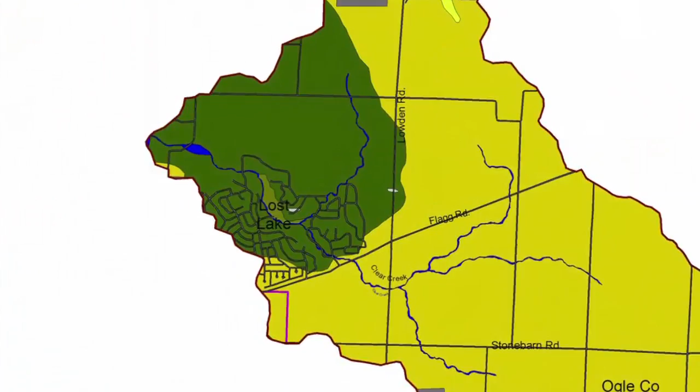Okay, this lake you see behind me is really born out of a community that was started way back when. But it's an 88-acre lake setting in a rural community with farmland all around us. And as this community grew and was developed, the developers actually took a stream that ran through here and developed this lake. And this lake certainly is just part of a watershed that's 10,000 acres around us.

In 1978, the River Conservancy District was born. And as the RCD was developed, one of the things that we understood as of late is that we had responsibility not only to maintain this lake, this particular part of the watershed, but also improve the lake and the watershed around it. And over the years, the Conservancy District was charged with monitoring the conservation of the lake, which encompasses a lot of things, from pollution to fish to wildlife to lake use and those types of things.

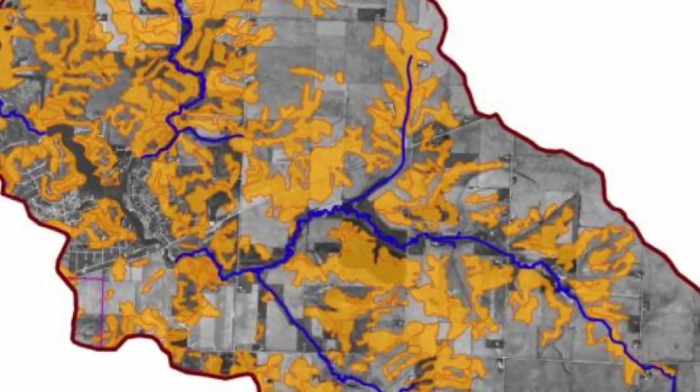So the River Conservancy District first recognized that they had problems with their lake, and also recognized that these problems don't just stem on their property but upstream from them and what's coming down into the lake from neighboring properties. And there's not one spot. You can't point to one source. So therefore it's called non-point source pollution. It's just a cumulative effect of pollutants coming from many, many different places.

Anytime you have sedimentation or sediment coming in or being eroded off the shorelines or off the stream banks or out of agricultural fields, it becomes a non-point source pollution problem. The sediment itself is a pollutant because it degrades the water quality and silts in the lake and causes environmental concern. But there's also nutrients associated with those sediments that are coming into the lake, which feed algal conditions and algal problems, weed issues, and other environmental factors that need to be remediated.

When you stabilize stream banks, the benefit to water quality is largely that you're holding back the sediment and soil that is on the slope. The rule of thumb is you want to keep the ground on the ground, and you don't want it in the water. And once you get soil in the water, it becomes a pollutant in and of itself because it degrades the water clarity, which degrades the habitat. Fish can't see to capture their prey. Aquatic plants no longer have sunlight to grow. When sediment is allowed to enter the stream or the lake, it carries with it a lot of pollutants.

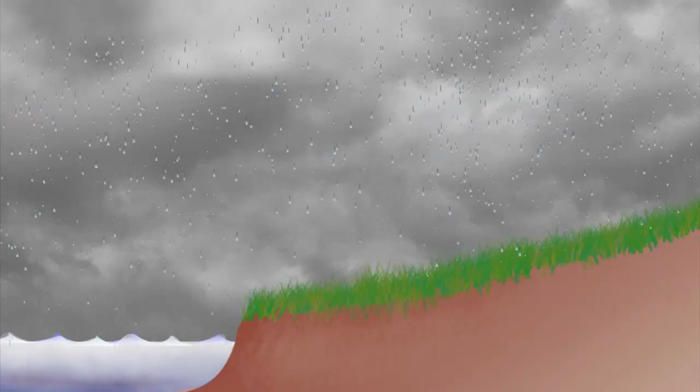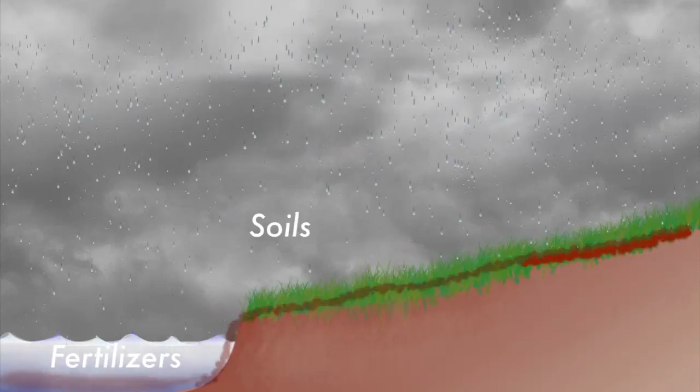In the situation around the lake, we're dealing with homes that have lawns straight up to the lake's edge. And anytime there's a storm event, that runoff that's running over the lawn and into the stream is going to carry with it any fertilizers that they used on the lawn, and it's going to carry with it any soil if there are bare spots on the lawn, and it's going to carry away the dog poop, the goose poop. All that, once it gets into the water, then it's a problem.

When upstream, we're dealing with kind of similar substances, but a different situation. Now the fertilizer's coming from farm fields, and the soil becomes a much bigger problem because every year those fields are tilled, and so we are dealing with large expanses of bare spots, basically, that are not covered in some sort of grass cover. And so if you're dealing with a pasture, a lot of people think that cows are a big problem for water quality, but when you look at just the land use, the grass that is a pasture has a much better capacity of capturing sediment and pollutants before it enters the stream when you compare that to a bare crop field.

The area that flows through Babbling Brook is about 3,000 acres that comes in from that tributary directly into the lake. There's a separate tributary that drains the rest of the 11,000 acre watershed. And what really brought a lot of awareness to the people who live here and see this area day in and day out was a storm event that happened in 2009.

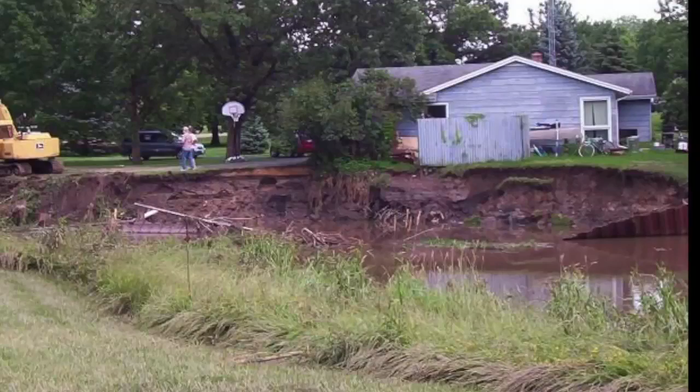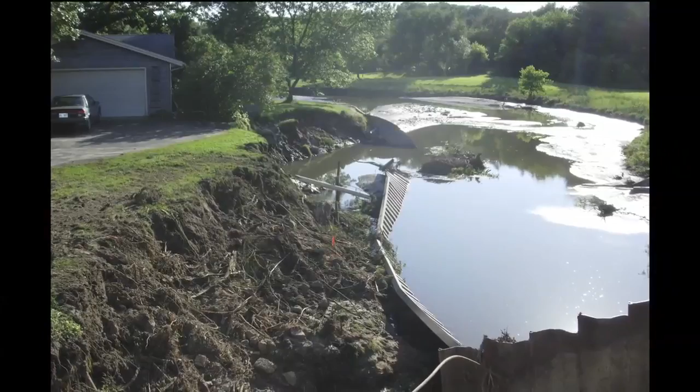And the storm event in 2009 absolutely blew the banks out of the Babbling Brook. What was considered a lazy little creek turned into a 15-foot wide creek that had banks of solid soil, 90-degree angle, that were about 6 feet tall. Well, during the flow, the banks were significantly eroded, and there's a sharp bend in the stream that the water angle attacked and significantly eroded the bank back into a homeowner's property. This created a lot of turbulence in that area, and that created a significant amount of erosion.

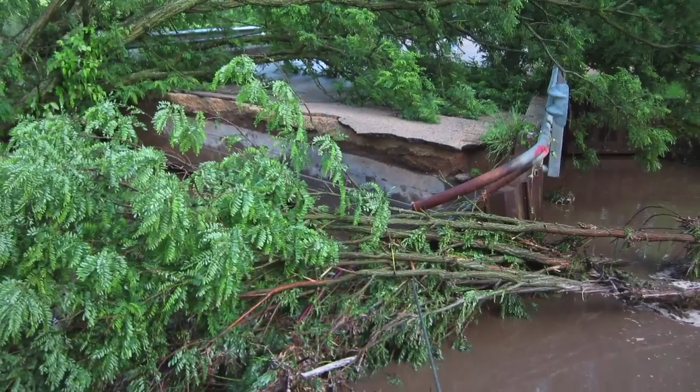The Babbling Brook actually washed out a bridge, lost probably 12 to 15 foot of shoreline along the stream bank on big reaches of the stream. This is what the old-timers will call a 100-year flood. And the experts will tell you it fell within the definition of a 100-year flood. That being said, the mission of the RCD in terms of taking care of the lake, not only for what it is today, but planning for the future, led to our thought of a project to stabilize the stream bank on Babbling Brook. To do that, we had to get a team of experts involved early on.

One of the things we did here is we established a team of individuals that can address all the different topics in a professional fashion. One, you've got an environmental or lake consultant that gives you the background and the things that are needed from an environmental and a pollution control perspective.

You've got an engineer that can help design projects that have the stability to withstand the flow conditions over a long period of time. Then you have to have people like Rebecca that has a grant writing ability and a planting background to ensure that we have the right plants in place and can actually secure funding to assist with a project like this.

And you have to have a project coordinator like Steve that's going to go out and do the groundwork to get the people in place and the landowners to agree to what's going on and understand what's going on, and to have a group buy-in to make sure this is a successful program.

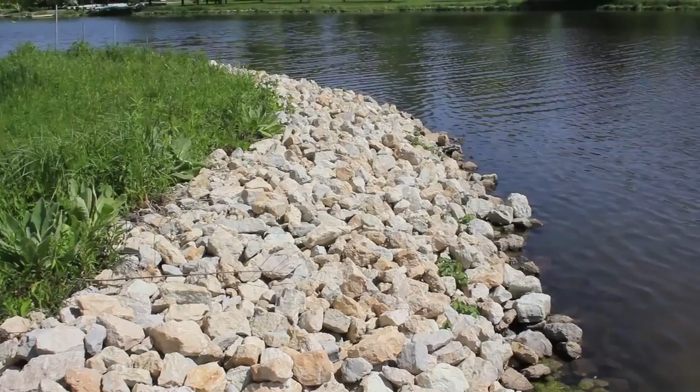And to do this, they graded their slope back on their banks, put down a bedding fabric, put down a bedding material, and put down an RR3 rock, which is a rock that was gauged for the stream flow conditions within the lake. It's much more costly to remove soil once it gets in the lake than when it's sitting there on the shoreline. So this was a cost-effective way to lessen a pollutant in the lake.

So we established that program, and we had quite a few property owners take advantage of that. We actually were able to stabilize about 70% of the shoreline that was pre-identified as the most problematic to the lake.

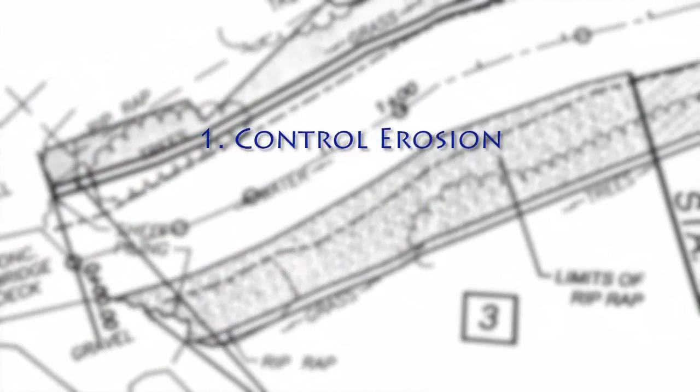Now focusing on the stream bank, there's about 800 feet of stream bank that we decided we're going to stabilize as an effort to minimize soil coming into the lake. The purpose of the remediation had three goals. One was to control erosion, which was significant in this reach. The second was to maintain the flow through the reach. And the third was to create or enhance the habitat.

We used a series of techniques to stabilize the section of Babbling Brook, our project area. And part of the reason that we used a variety of techniques was to show people what different methods could be used, with the idea that they'll learn from this. This is a stretch that they can come and see and then recognize, well, I have a similar problem on my stretch, and now I see what I can do, and start the ball rolling for other people to do projects on their own properties throughout the watershed.

And so if you start from the bridge and work your way upstream, the bridge, it's kind of a channel. In fact, most of the area we're working in had been channelized at one time, which led to some of these problems in the first place, because a naturally meandering stream is going to be able to handle the force of a storm better than a channelized area. And so right next to the bridge, we have the most channelized area that needed the most reinforcement.

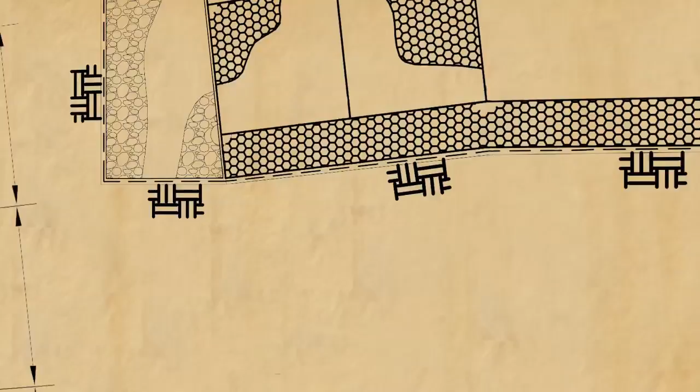One of the areas had a very steep bank that we could not change the slope on. With that, we decided to use a gabion structure. Gabion baskets were selected for the area of the high bank because there was a road at the top of the bank that could not be moved, and the bank had to remain where it was. So the gabion baskets were a perfect fit.

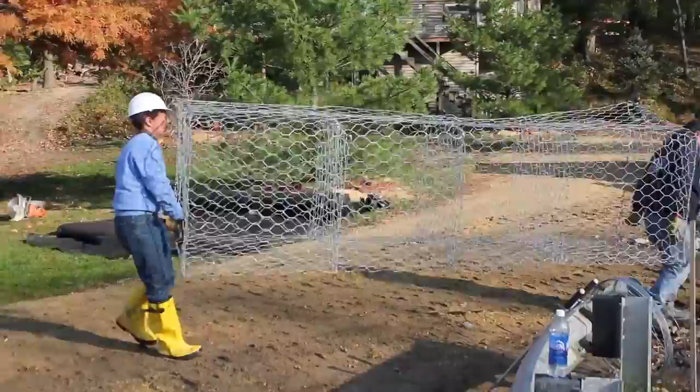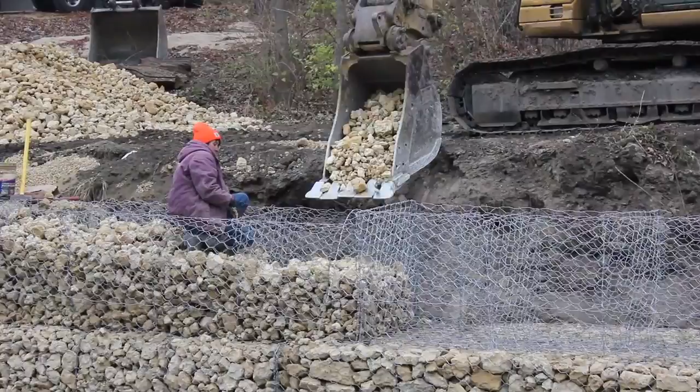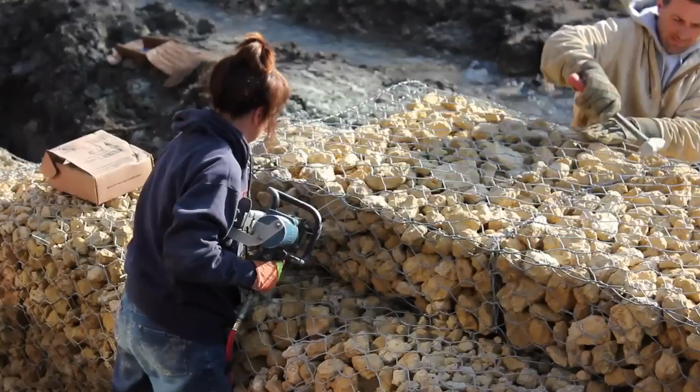The gabion baskets themselves consist of pre-manufactured wire baskets that are set in place, individually filled with rock, closed, and then another basket set adjacent to it, individually filled and closed. And you can build a wall on a slope that's much, much steeper. And so we used that in the area where we didn't have a lot of room to work.

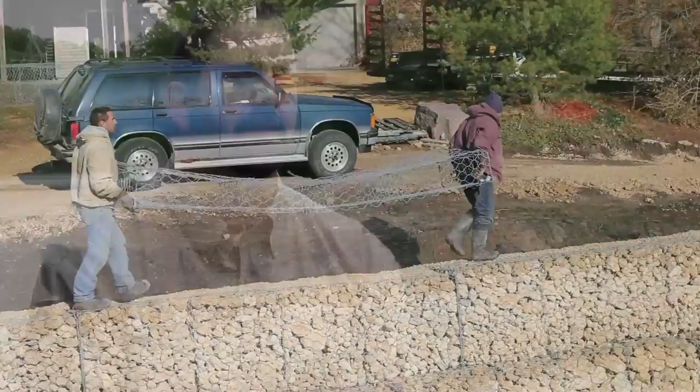One of the issues with utilizing gabion baskets, though, they're very expensive. The labor-intense construction of a basket, it costs a lot of money to do these. However, when you have a situation where you cannot grade back a slope, this is an ideal stability that has a long-term effect in preventing shoreline from being eroded again.

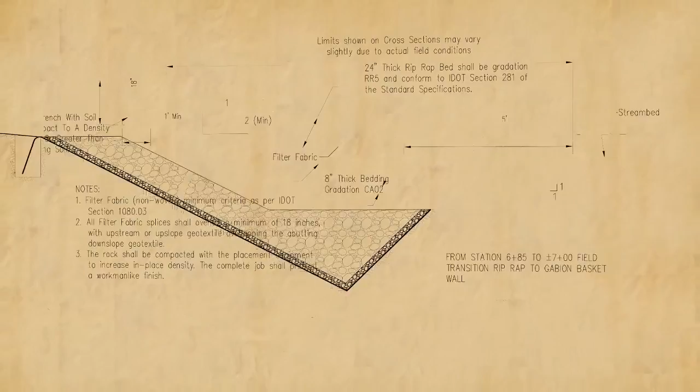Areas where we can actually lay a slope back, we decided that we would do a riprap structure that had a RR5 rock, which is about a 90 to 100 pound rock. Each boulder is about that big. So in the stream flow, in the heavy conditions we have here, those rocks won't be moving.

We use riprap in areas where we could because of its economy, but in order to do that, the stream bank had to be regraded to slopes not exceeding 2 to 1, preferably 3 to 1, and then prepared with a geotextile fabric and granular bedding to set the riprap on.

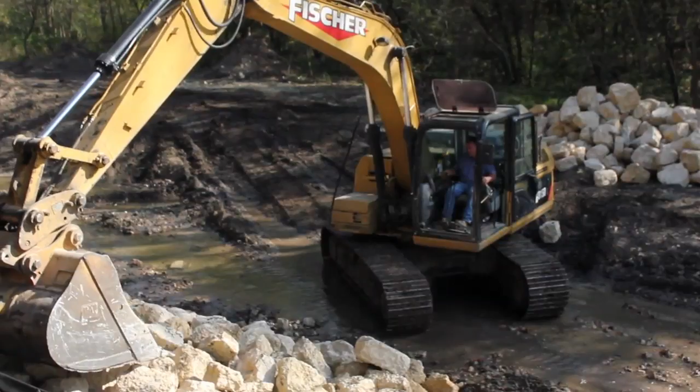The slope had to be laid back to a slope no steeper than 2 to 1 because the natural angle of repose for rock is slightly less than that. We wanted to make sure that in its natural state the rock would stay where we put it, and also under stream flow conditions when it was attacked by a velocity coming through there with the water force that the rock did not move.

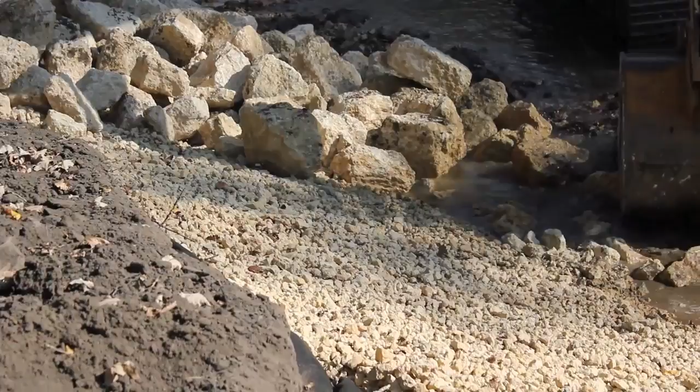Going through the hydraulic design for the stream, velocities were established at different reaches of the creek. Where the riprap was selected, velocities were determined and the riprap was sized to combat the velocity forces of the water. At the stream's edge, a trench was dug in which bedding was put in and riprap was keyed in to keep the bottom of the riprap from eroding and also to keep the riprap from sliding into the channel.

The toe of the riprap is significant in maintaining the riprap face because that's where the erosion is controlled that would allow the riprap to slide down into the stream bed.

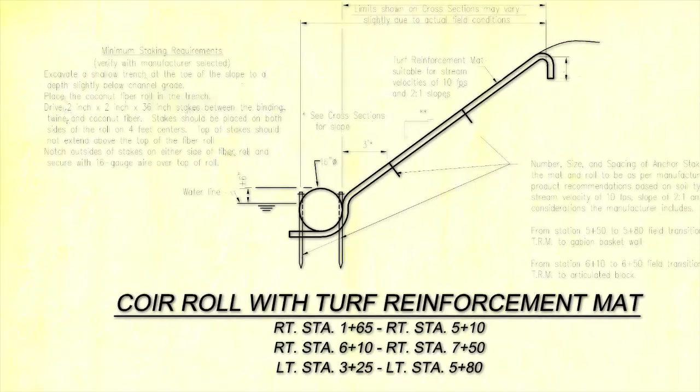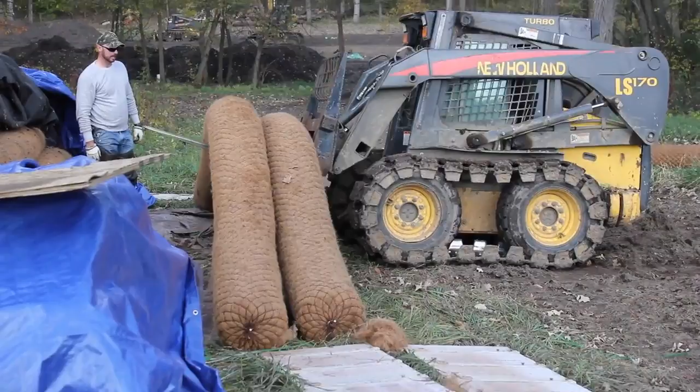We also utilized in the areas that had just flow conditions but not a heavy brunt force a program with coir fiber, native plantings, and a mesh matting. Both the mesh and the coir fiber were gauged to withstand flow conditions of 10 feet per second or more, which is conducive to the environment we're dealing with here at the Lost Lake.

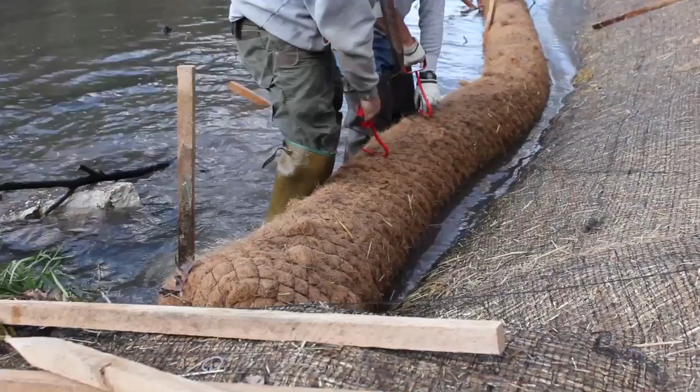The mat was chosen based on the velocity of the stream. Mats are available in different densities depending on the velocity it has to resist and its porosity to allow for plantings. The mat we selected matched the velocity of the stream and was also able to be planted in place.

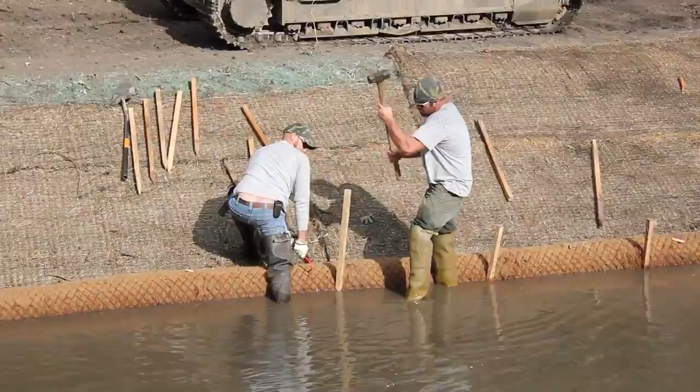I worked with Dick, the engineer, to come up with a solution for those areas of the stream that weren't receiving the direct current, that weren't receiving the brunt force of the water. In order to consider vegetation for the site, you do need a certain slope. If a site is too steep, you're not going to have good success.

So you have to have a slope that is about a 3-to-1 ratio, which means step up 1 foot, step back 3 feet. And if you were to do that, instead of having a stair step, if you were to lay a slope on that, that would be a 3-to-1. Anything 3-to-1 or less steep is suitable for vegetation.

We chose to use grass and wildflower mixes in any area that we could have used vegetation along the shoreline. And there are several reasons for that. One is that the native grasses and wildflowers have extensive root systems that hold the soil much better than agricultural grass or brome or any other non-native choices.

The reason we decided to use grass and wildflowers instead of shrubs, basically you get more coverage on that bank. Shrubs can lead to shady spots and bare areas, and so we felt that the grass and wildflowers would be a better solution for this particular site.

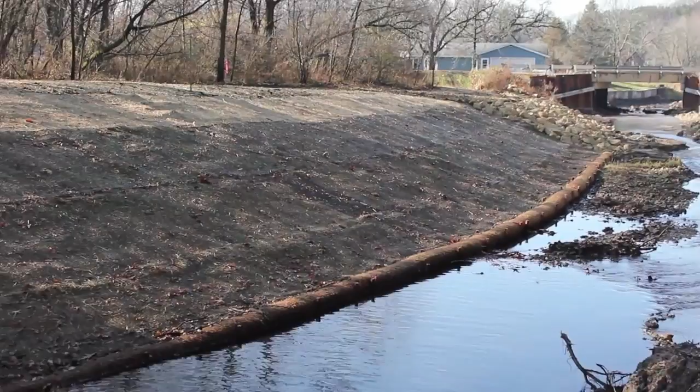We had to take into consideration the velocity of the water and how much energy the areas were going to receive by the water. And so we used seed for the most part because it's a large area, so it's suitable to do seed from a cost perspective. It also is easier to manage than if you were to use seedlings. And we only used seedlings right at the bottom of the slope where we had coir logs.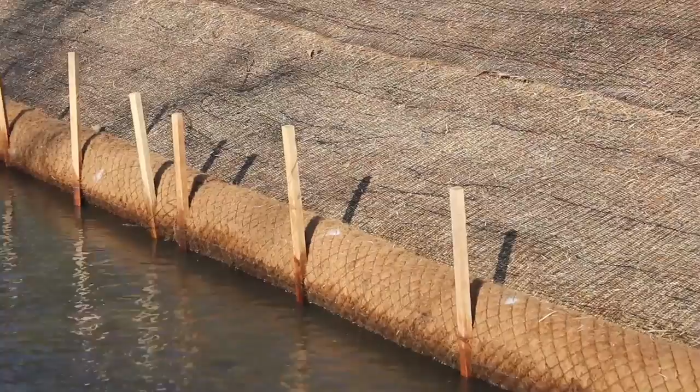And the coir logs are coconut fiber that's rolled, and it takes the energy of the water for about 5 years. It takes about 5 years to degrade, and that is a good length of time to allow the vegetation to establish. And once that vegetation is established, then it will hold up to the force of the water at the bottom, the erosive forces. Until then, that coconut fiber is necessary. And so we were able to put seedlings into the coconut fiber.

We used several different mixes of grasses and wildflowers because you're dealing with a slope. So the plants that like to have wet feet are on a strip just where the water's edge meets that slope. Once you start going up the slope, we change into a mix of plants that like drier conditions.

We planted tall vegetation because reed canary grass is a problem here, as it is in most wet areas in Illinois. And to outcompete that reed canary grass, you want tall native vegetation.

And then once you get to the top of the slope, reed canary grass is no longer a big issue. We switched to short vegetation, and that was for beautification reasons and for homeowners, because these areas back up to backyards; it blends well into a more manicured setting. And so what we'll end up having is the manicured yard will come right up to a mix that we just call the homeowner's mix. It's shorter grasses, about 3 feet tall, with flowers popping up out of that. And then once you hit the slope, it's the taller vegetation that's more designed for weed control and holding the bank.

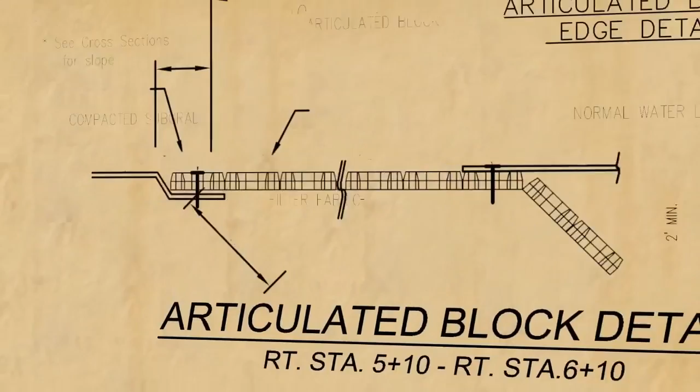Some of the areas where we had to have a nice smooth transition and flow, we decided we would go ahead and put in what's called an articulated block. Now, one of the issues there too is the landowner needed direct access to the creek and the stream for their normal activities of how they like to enjoy it. Not to mention the fact it was a stream bank that had a hard cut from the erosive forces of that flood. With that hit of the water in that area, we couldn't just do a slope and seed or anything like that. We had to put in an armoring or a bioengineering method known as an articulated block.

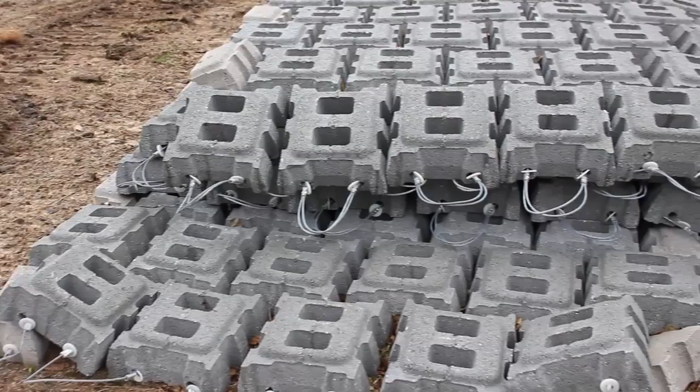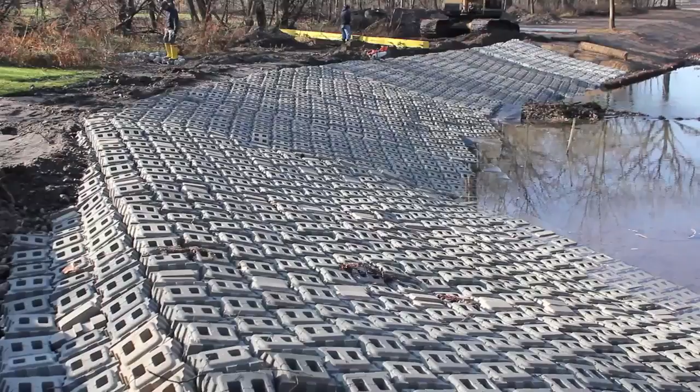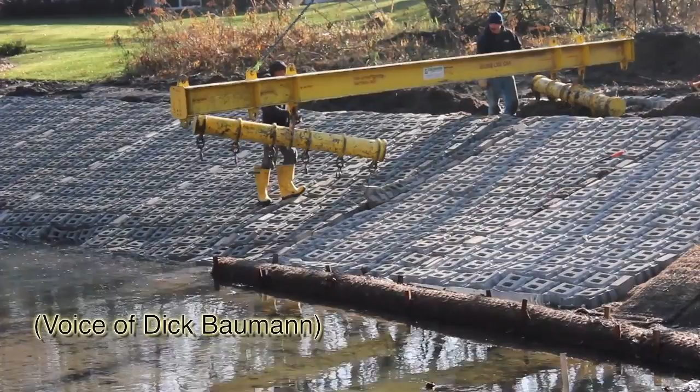This is a block that's actually mesh wired together with cable, and it looks like a puzzle. That's laid onto the soils, keyed in on the top, keyed in on the sides, and free floating at the foot. So if there's any soil erosion at the foot, it continues to fall down and cover it, and provides the necessary protection to keep that soil in place. When the block was installed, the top row at the top of the bank was keyed into a trench. This prohibited the block from sliding down. The upstream edge of the block was keyed in also to a trench so that the oncoming flow would not get under the block.

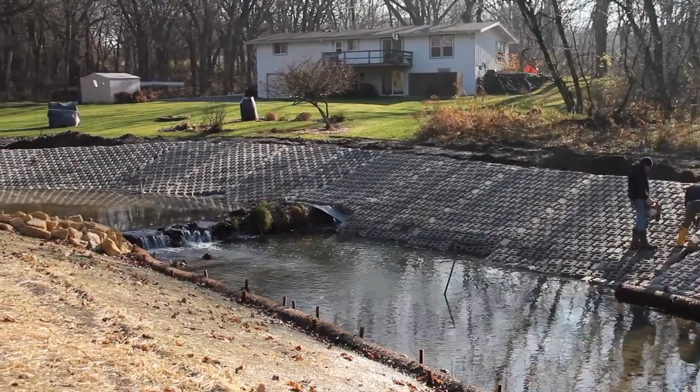One of the nice things about using articulated block is the voids between the block can be filled with dirt and planted. Eventually, the block will vegetate itself, and in time, without erosive forces, the block will be fully vegetated and maintain the structural protection without being seen.

To apply for a grant from the EPA, you need to be as close to the source of the problem as possible. You need to effectively address the problem. So you need to identify what the pollutants are and how your project is going to help in quantitative numbers. The grant that was secured to stabilize Babbling Brook and Lost Lake shoreline was given to us by the Illinois Environmental Protection Agency through their Section 319 funding. And Section 319 came out of legislation from the Clean Water Act. And the Environmental Protection Agency in that capacity is interested in water quality. And so our project is also interested in water quality, which made them the right fit.

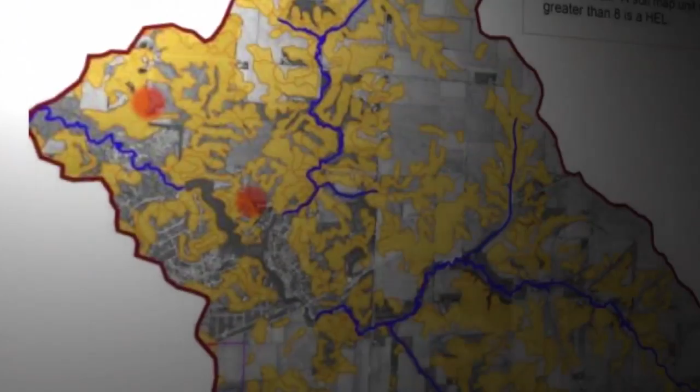The EPA is looking to fund projects that address watershed issues. They're looking for multiple locations. They're looking for multiple participation. Let's say that the solution is that we're going to restore wetlands. Instead of just restoring one wetland, which is fine, they want to fund a project that's going to restore several wetlands, and in one swoop, with all the administration that goes into this grant, we're going to be able to address the issue 3 times or 5 times as well as if we were just to do one site.

The other thing they're looking for is combining techniques. So let's not only restore wetland, let's restore wetland plus put in filter strips next to farm fields, plus restore the stream banks, and combine the different techniques so that, instead of just having a certain pollutant load reduction, let's magnify that 3, 5, 10 times in one project, because the administration of these grants is so large.

One of the things people need to keep focus on is the fact that the watershed itself is impacted by more than just an individual. And when you take a holistic approach like we've done here to improve the watershed and the condition of the watershed, you've actually impacted more than the individual landowners. This project's encompassed several different landowners as well as all the different people at Lost Lake and people downstream, because the water quality that's in this lake is also running downstream into the Rock River. So any impact you do on the watershed has impacts throughout for everybody.